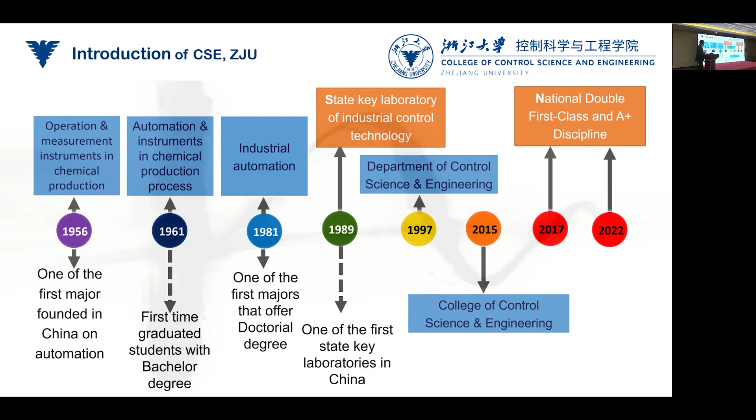Control is not a standalone field in the ranking system, so mostly it's part of engineering. For engineering, in the US News ranking, ZJU was number 10. For Times ranking, ZJU was 30th, and for QS it was 29th.

In this college, right now we have 5 institutes, and the main research areas can be listed as follows.

Industry intelligence and optimization control. We focus on industry big data, knowledge, automation, large-scale optimization, distributed control, intelligent manufacturing, smart manufacturing, etc. And we have robotics and intelligent management systems. We focus on perception, planning, control, coordination, learning, and decision making. We focus on cyber security and safety for industrial control systems.

Lots of topics inside this field. And we have smart sensing and measurement. Also, we have perception, and we have early warning, highly adapted optical detection, etc.

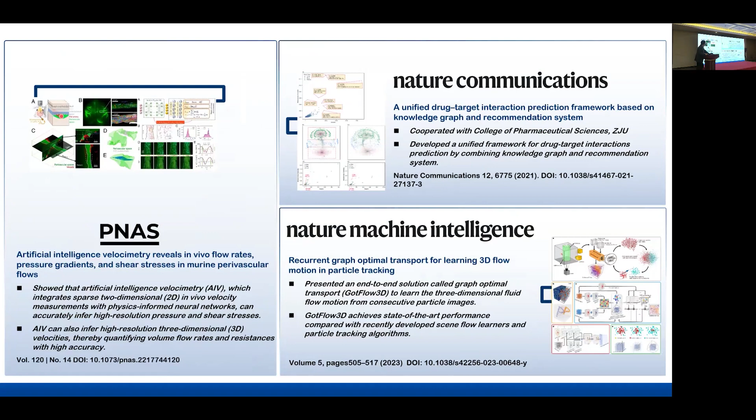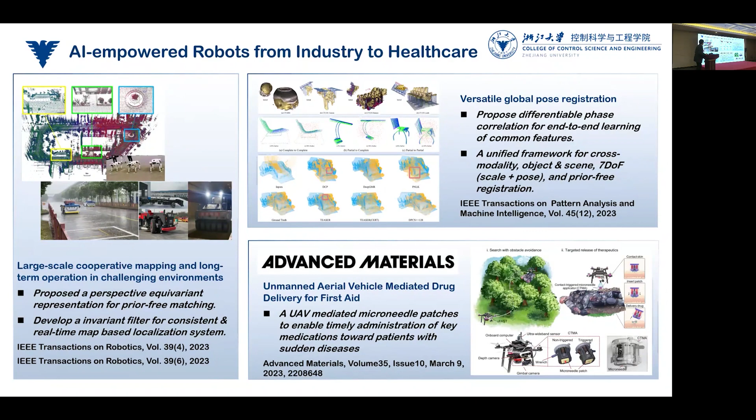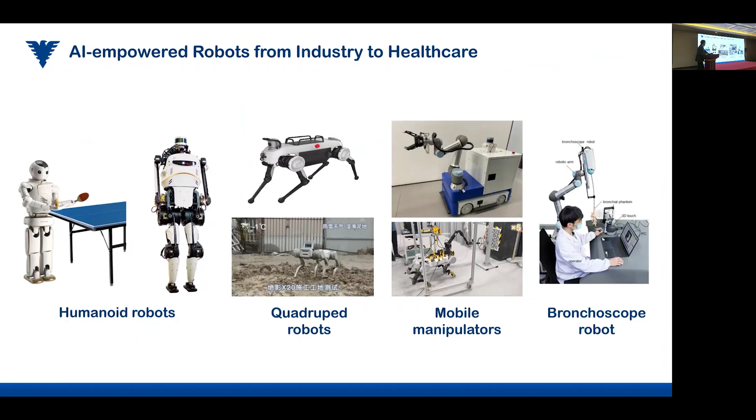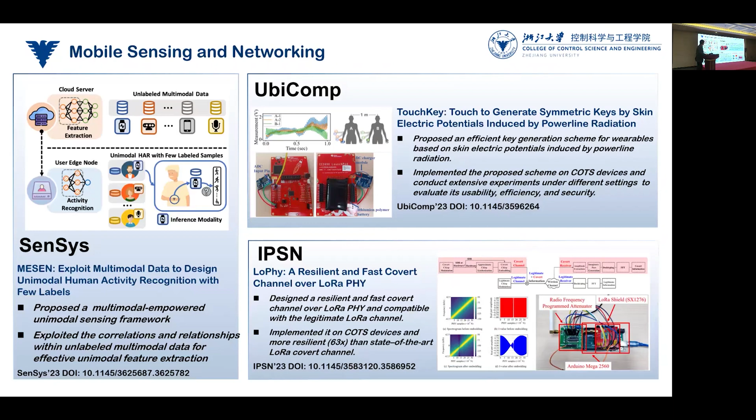We developed several AI-empowered robots. This field covers from industry to healthcare. These are several representative robots, humanoid robots, and quadruped robots, mobile manipulators, and bronchoscope robots. And also we contribute a lot to the field of mobile sensing and networking systems, in the field of microsystems and microengineering.

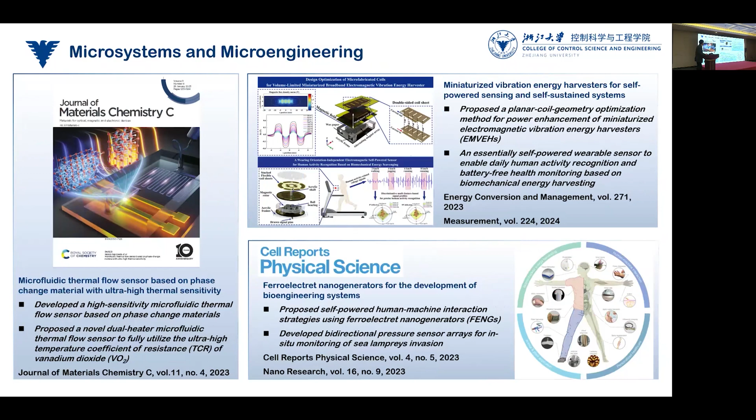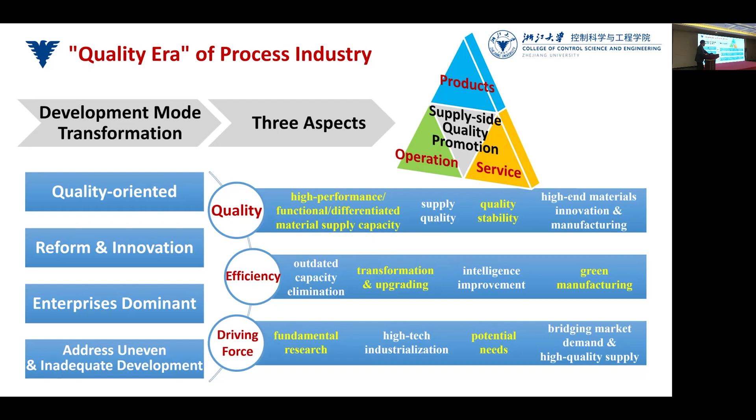So let's move to the process industry, because here we have the workshop of PSE. Everyone in China right now talks about the new quality productive forces. Chinese people know about that. I think quality is very important and efficiency is very important. There are many driving forces to enhance the process industry. The motivation is very clear.

We are trying to develop the advanced integration of information, I'm sorry, informatization and industrialization. This will lead to intelligent manufacturing. We need to meet the demand of the society, and we need to do more technology development. Two sides: the quality promotion and the supply side reform are very important.

Also, we need to establish automation and instruments, control, the discipline of chemical engineering, material engineering, mechanics, and also computer science and mathematics.

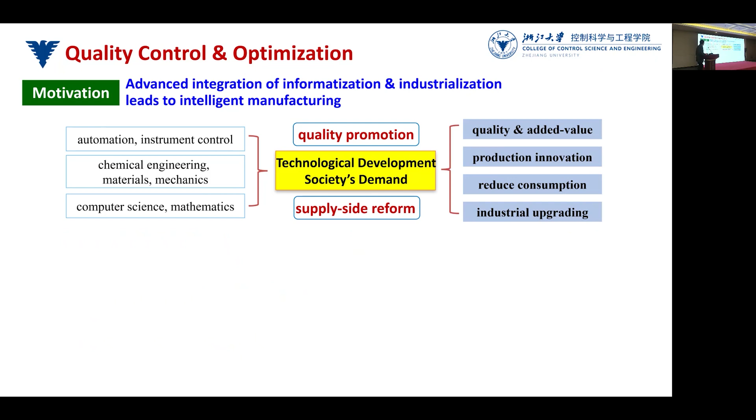To meet the demand of process manufacturing, we have high quality, efficient, flexible, this kind of demand. And also we have the measures: the product quality, the flexible production, and the variable operation conditions to be very adaptive to the energy conservation and the emission reduction needs. So it is very important to have the multidisciplinary integration of control, chemical, and material science.

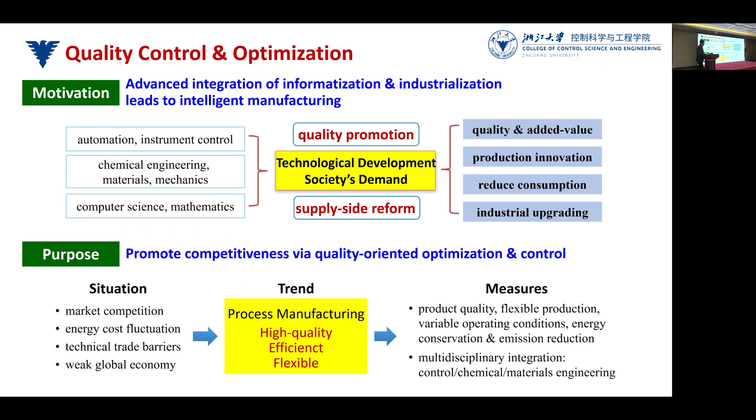As of polymers, the domestic capacity of polymer is over 1 billion tons. And the global annual growth is bigger than 5%. So the industry calls for high quality, high value products, and less consumption and less emission. So is it possible to produce differentiated high-end products without or with very minor equipment modification? Is it possible to improve productivity and efficiency, and also reduce consumption?

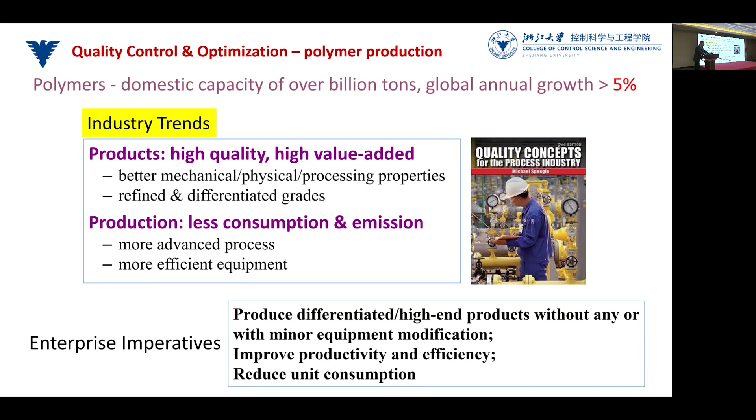So here, we can define quality: not only the quality of product, but also the loop quality, the control performance, the fluctuation, the equipment, the life cycle. And also we can talk about the operation quality, like the consumption, the economic target. And finally, we can talk about the service quality, like how to deal with orders, inventory, and also logistics.

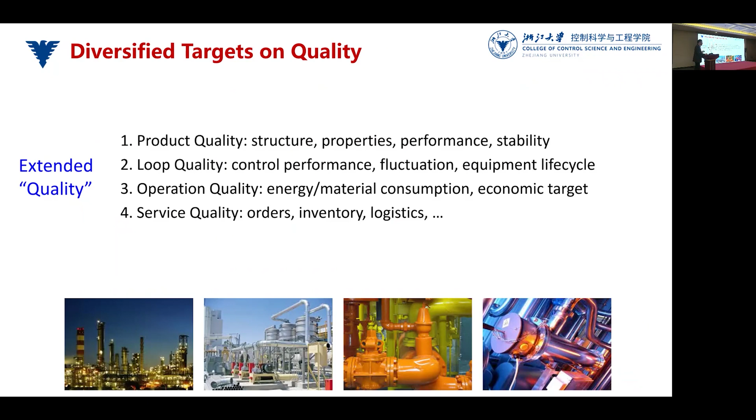So I think this is the extended definition of quality. But how to do this in the AI era?

Everyone talks about big data, large models, and lots of fascinating happenings. For artificial intelligence, we mostly talk about computing power, data, and algorithms. And for the big industry,

we talk about the mechanism, the first principle model, the process, the equipment, how to bridge the gap. I think after so many years, we are still focusing on industrial intelligence, like modeling, control, and optimization.

This kind of understanding is based on the understanding of control theory. I think from the chemical engineering point of view, maybe you have a different view.

To me, I think it's important to have a definition of the hierarchy of intelligence. We can have this scope, especially the benefit defined, to have a very clear upgrade of the intelligence.

For loop level 1, we have the feedforward, the very basic feedback and feedforward design to deal with the nonlinearity, to deal with the sensor, control, actuator — the basic loop.

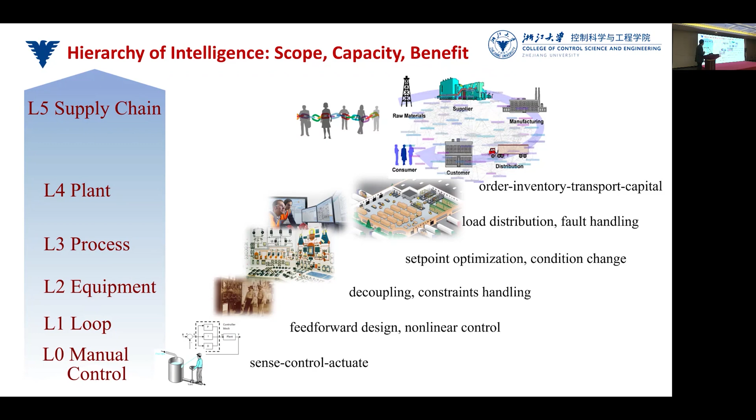So I think it's time to integrate the process, equipment, optimization, and control together into one picture. This is our view. The vertical axis is tools — the theory and methods of control engineering. We are very familiar with system identification, advanced control, real-time RTO, even process re-engineering and diagnosis.

For the horizontal axis, we have disciplines like chemical engineering and materials engineering. So we can list lots of topics, like how to predict the microstructure quality, how to make the model updated and corrected, how to do online quality analysis and product performance prediction, how to do QPOP — quality-oriented process optimization and control — and how to do multiple product system scheduling and transition, etc.

I think the most important thing is to be more and more quality specific.

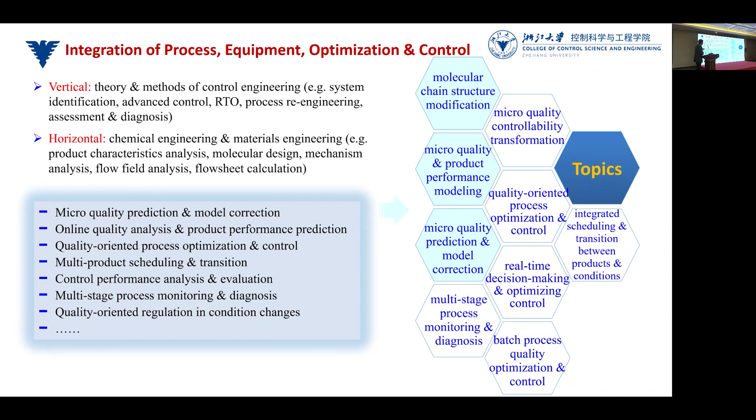This is our R&D vision. We need to define the quality impacts, do real-time optimization for the real plant, and switch between multiple products for scheduling. So we have three big topics: modeling and analysis, optimization and analysis, and finally optimization and control in changing conditions.

So we listed lots of research topics here, and I think each of them can be a PhD topic.

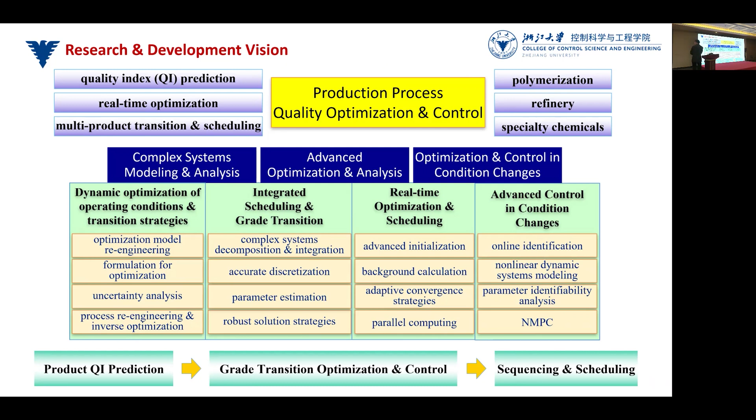Let's have some very brief examples. This is modeling and quality-oriented optimization for customized polymer production.

There are several loops here. You can see this is information flow — real-time data, hourly analysis of the melt index, and offline analysis of GPC for MWD analysis. And we need to update the model for the key parameters.

We need to do the prediction, and we need to download the set points to the control system. So we have several loops here.

And the key issue is the model — the static model and the dynamic model. So how do we use very limited information to update the model and gain more insight into the process, and then how can we have the molecular weight distribution embedded, controlled, and manipulated for online use.

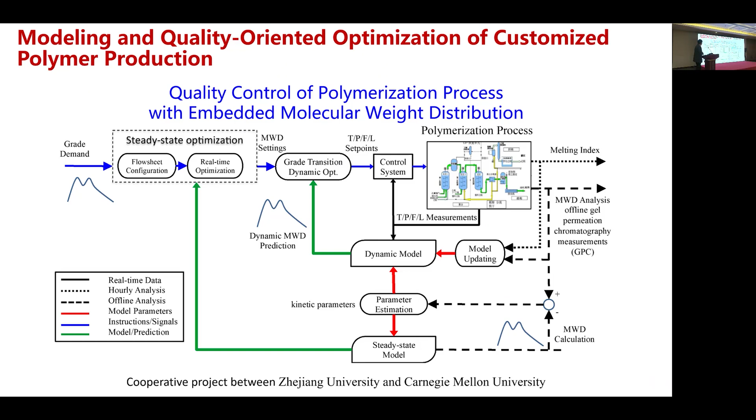The second one is the transparent factory. The group from Zhejiang University of Technology, Zhejiang University, and PSE did a lot in the development of analysis, simulation, and optimization systems for the hydrogenation process of amino compounds.

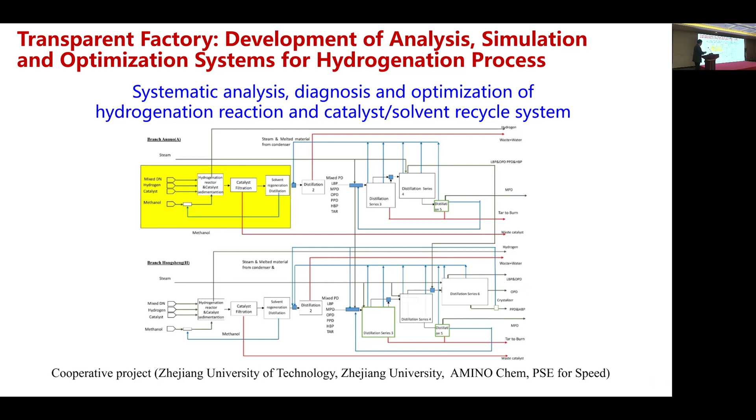I think this is a very representative application for the quality topic.